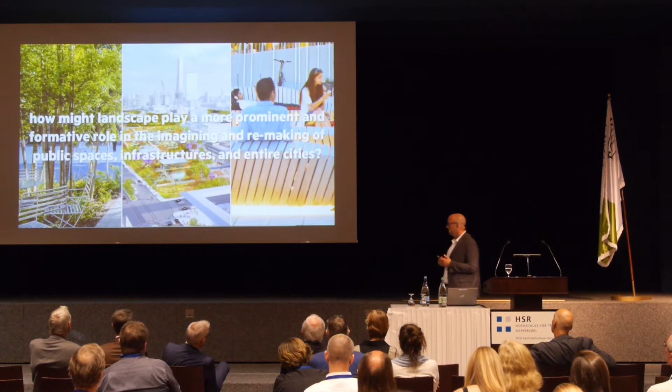Stoss, my firm, is formulated in just this mode, a practice generated from ideas and centered on design, and a hybrid studio informed and cross-pollinated by research, experimentation, and teaching. I really started the practice with a question and a research project. The question was this: how might landscape play a more prominent and formative role in the imagining and remaking of public spaces, infrastructures, and entire cities? Not as a piece of leftover thinking, but as something that really generates new ideas for design and new ideas for the ways in which we live.

The research project resulted in this article called Public Works Practice in Charles Waldheim's Landscape Urbanism Reader. And here I looked historically at a number of key projects throughout North American civil engineering history. And I was looking for ways in which these projects demonstrated interdisciplinary thinking and even entrepreneurial practices within the scope of really broad-reaching projects.

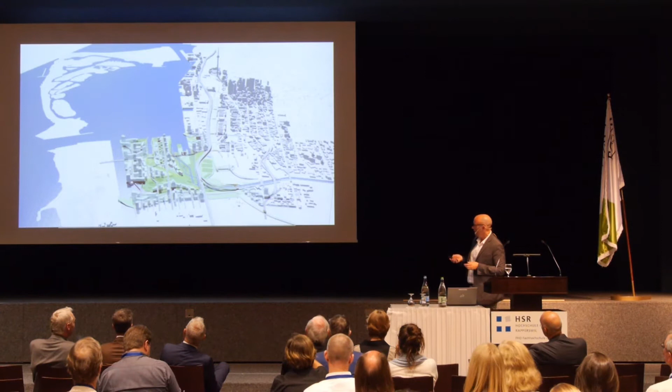Through the practice, we explored some of these ideas at multiple scales using design competitions, this for the Lower Don Lands in Toronto, Canada, a new proposal for urbanism really built on the breeding habitats of fish in the river we were trying to restore. So how is it that we begin to think about ecology as a starting point for remaking the way that we live in dense urban cities?

We also did a few experiments in free play and creativity, understanding that people are quite inquisitive creatures. How is it that you create familiar topographies, unprescripted landscapes, and allow people simply to engage their imagination and their physical bodies in exploring these places? For us, it was a great way to begin to think through the way that people can potentially simply engage with a place, no matter what shape or form it might be.

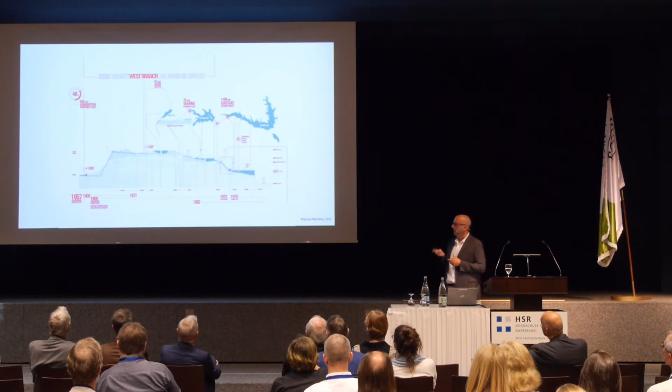I also had the opportunity to teach early on, and did a number of seminars and studio projects that really looked at the ways in which we might recalibrate single-minded infrastructures from the 20th century into much more multidimensional infrastructures that could take on other agendas, ecological, environmental, social, cultural, economic, for the decades and centuries ahead.

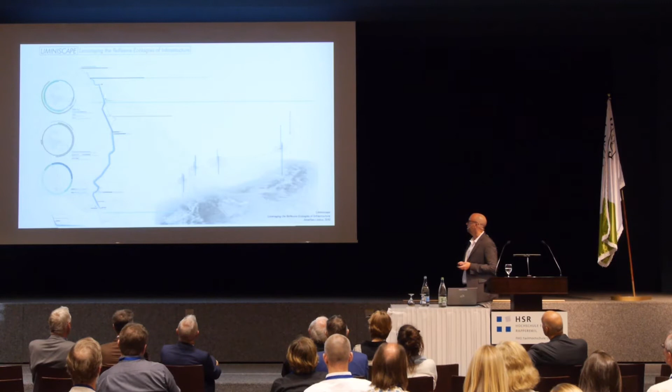So with that as a starting point, what I wanted to do today is just simply explore a number of starting points for us, both in the practice and in my own teaching and thinking. The following three broader topics, I think, offer insights into the ways in which we might use contemporary ideas and techniques borrowed from or in collaboration with other disciplines, as well as contemporary tools and approaches to real-world issues that might better address the complexities and challenges at hand.

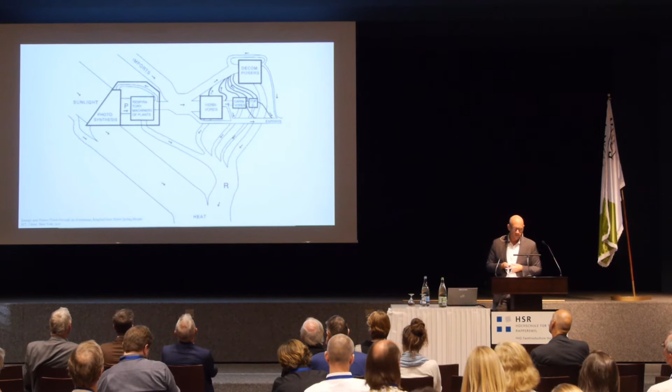So the first of these topics is the idea of flux, flows, oscillations, the idea of being in a state of continuous change. This, of course, is an idea derived from complex adaptive systems ecology, in which the world and its ecosystems are dynamic, constantly shifting, adapting, evolving to environmental and human-influenced conditions.

And as Christian pointed out, these were ideas that we were able to explore through research and this book project with the planner and ecologist Nina-Marie Lister, in which we engaged contemporary thinkers in the natural sciences and in the design arts to begin to think about where the project of ecology is and where it might be going.

But we also use the opportunity to find overlaps between the ways in which we worked. Steward Pickett, at the conference that kicked off this book project, noted that ecologists and designers both work with drawings and models. Ecologists can't experiment on the ecosystem at large. So in a lot of ways, we develop our ideas through drawing and modeling.

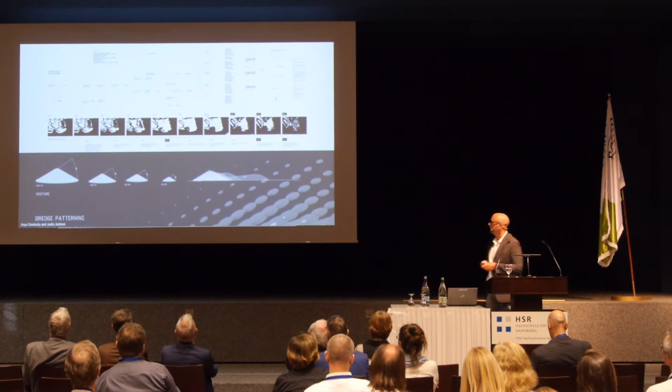And with this idea of a kind of starting point for conversation, I've been able to explore these ideas in a number of different venues. Teaching at the Graduate School of Design at Harvard, we've looked at the ways that adaptive ecologies at work in places like Jamaica Bay in New York City might set the tone for a different kind of adaptive urbanism project that might constantly shift and change in response to environmental informants.

We also had students look at analogs of these ideas. How is it that we might think through interactive real estate games and scenarios that might allow for the building of more robust ecologies? At the same time, it allows for densification of the urban environment, where development here leads to a better environmental state rather than putting this question into debate or as an either-or.

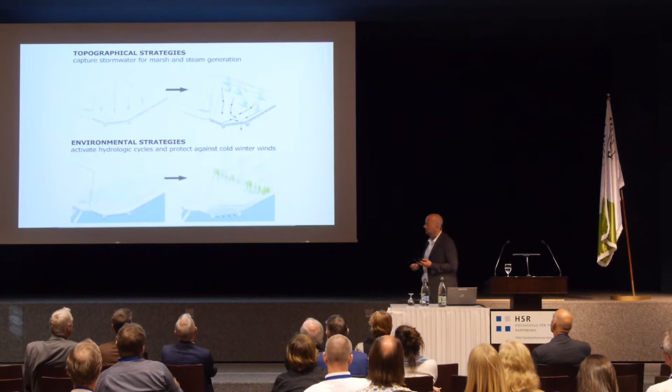Within the practice, we've explored these ideas at a couple different scales and sometimes in very, very simple ways. A project on the waterfront in Milwaukee, Wisconsin, where we were simply trying to revive environmental dynamics on this industrial-filled site. And it's a very simple strategy where we redirected on-site stormwater moving across the site, allowed it to infiltrate the ground, and more importantly, collect in the lower area of the site to reestablish and reinaugurate a dynamic natural marsh, a marsh that the infrastructure and industry of this place once displaced.

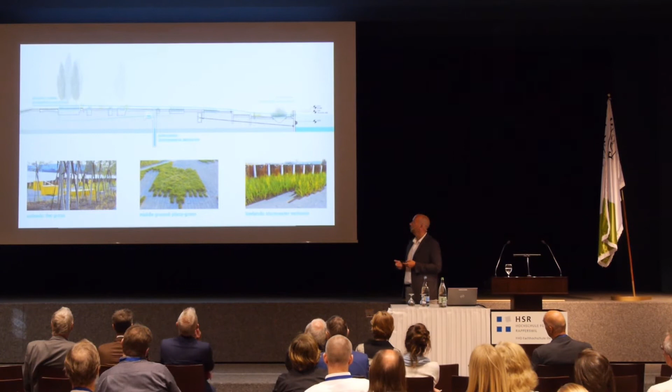We were using some of the protective infrastructure to help reestablish this marsh. And the marsh is really quite dynamic and beautiful. It has many different seasons to it. It has many different characteristics to it. And just the simple change in season allows for a reading of environmental dynamics right in the city. We also cut slots into the existing bulkhead wall so that at high water levels, the river would invade the space. So giving water space within the city was really quite important.

There are also a set of material ecologies at work here. The very specific relationship between the rusted steel bulkhead wall, the really soft and lush marsh plantings, and these new fiberglass seating and lighting elements for us put in play a conversation between the natural, if you will, the industrial, and a bit of the technological. And of course, all of it is there to really embrace people and really understand that the dynamic that we're interested in here is as much social as it is ecological.

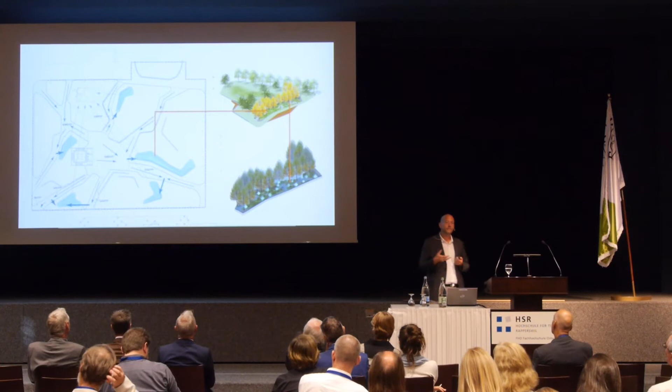Taking the idea one more step, how is it that we can bring sustainability to life in urban spaces? Working at the University of Michigan, a project where we're trying to capture all the site stormwater in these five very lushly planted infiltration gardens. Here we were interested not only in creating a beautiful garden and performing the function that was required, but how is it that we can really bring this ecological function to life so that it's experienced in wonderful ways by people. So here we're developing an environmentally responsive lighting strategy, one that's integrated within the gardens.

You can see the little light fixtures here below the mature bald cypress trees. And the idea is that every time water enters that system, the lights will flicker. So at that moment where it's most miserable, most cold, most rainy, where people want to run away as quickly as possible, we've brought this garden to life in ways that really make you want to linger and really have a wonderful effect on the ways in which people might experience this place.

Some of the tests, this was just last Thursday. The elements are going in and being tested right now. And so it's an exciting moment for that project, and one of the first opportunities we've had to do something with a little bit of refined technology in it.

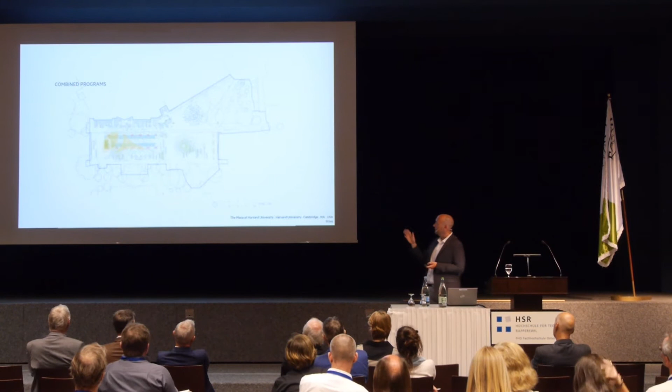It's also a space that's set up to host a number of different changing activities. So the surface, even though it's quite simple looking, is really embedded with foundations and utility hookups, water, power, et cetera, so that any number of different activities can actually occupy the space. So as part of the design process, we were looking at the scripting and scoring of these different activities and the ways they might inhabit the space. And that allows really for a constantly changing mix of activities, whether it's markets or performances, student boxing matches, skating, curling exhibition. Last winter, memorials for the Boston Marathon bombing, and even student protest.

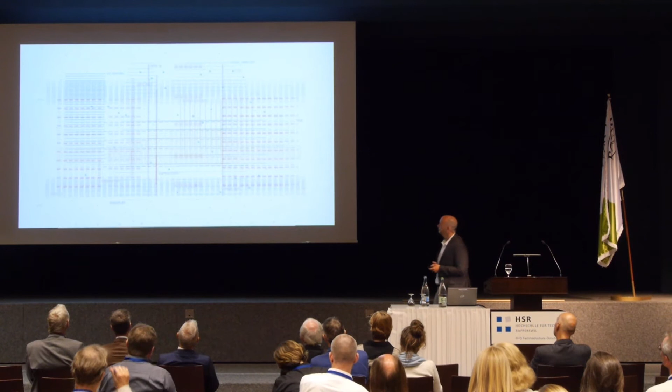And it's become a space that's iconic at the heart of the campus, incredibly successful simply because it takes on these same ideas about ecological adaptability and dynamics and choice and diversity, and really scores that into a public space. Even the infrastructure of this space. This is the crash wall that prevents trucks from leaping over the edge and crushing the cars below. Even that infrastructure is civilized in a way, inscribed with wayfinding and seating and bicycle parking, so that each of the elements of the project perform multiple functions in distinction to the existing piece of infrastructure, which really was set up to perform one.

Second topic, generative processes. Here I'm thinking about relational and associative techniques and technologies, design that is neither static nor compositional, but dynamic, assemblies of forms and components that might be generated from a set of logics that can adapt themselves to circumstance or changes as projects are conceived and deployed. Here we're using tools and techniques that other design professions and other disciplines are using. We're thinking about construction and fabrication technologies, and we're thinking about ways in which their applications can be quite versatile, from the scale of furniture and the human body to the landscape and the site, all the way up to the scale of the city.

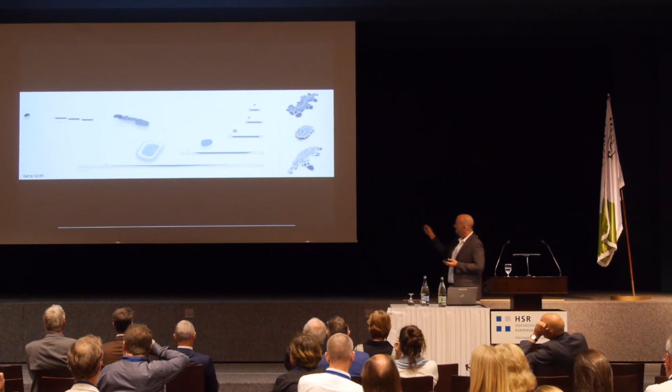These projects were early explorations in how you use dynamic and associative tools to begin to generate new ideas of flexible landscapes set up on a set of principles. This is a water collecting, cleansing system for contaminated runoff, and understanding that that system might be deployed in multiple ways depending on the condition and the ways in which those projects might hit the ground. And these are tools and techniques that we're exploring in many, many different ways at the GSD as a foundation for the way in which landscape architects might begin to think about the making of landscapes and cities.

And of course, you saw those same tools and techniques being used in the benches at Harvard. This idea of many, many, almost an infinite variety of combinations and prototypes were developed for the project. And we're working between analog and digital tools in order to test these for fabrication and installation. Again, each of these is built on a set of component parts, put in different combinations with one another, and then deployed in different ways on the site. Each of the ribs is numbered and can be easily replaced, using some of the same software technology to power the fabrication machines that we're using in the office to design the landscapes.

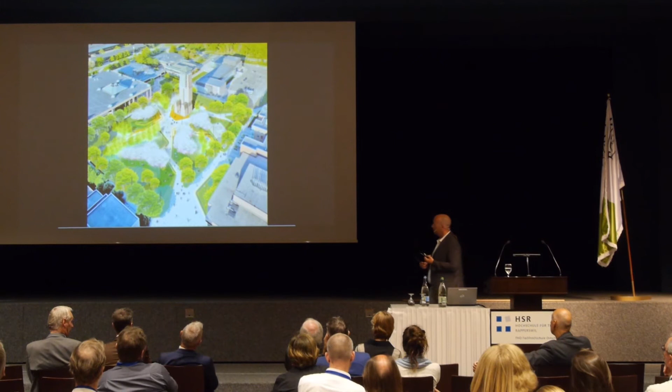Again, at the University of Michigan, this reinvention of a 4-acre quadrangle uses these same tools and techniques at the scale of the site. In some ways to generate a space for walking and gathering in many ways. But here we're using a combination of landform, seat wall, and seating elements in combination deployed across the site.

You can see this project in a state of construction. This happens to be the final version of this, but the tools really allow us to study very quickly different combinations, different massings, different deployments in ways that set up different spatial and physical relationships and spaces for other kinds of program to play themselves out.

Again, experiments with seating. We're finding that even though we started this project thinking about ourselves as urbanists, a lot of the work we're doing is really at the scale of the human. So these are concrete and metal benches built from a set of parts that can be put together in various combinations to create different kinds of seating arrangements deployed across the site in order to then create the kinds of flexible and diverse spaces that we were interested in creating here.

And here you can see a couple photographs just from last week. The project isn't quite done, but they have opened it as the semester's beginning, and we're excited to see the finishing pieces of this come into place.

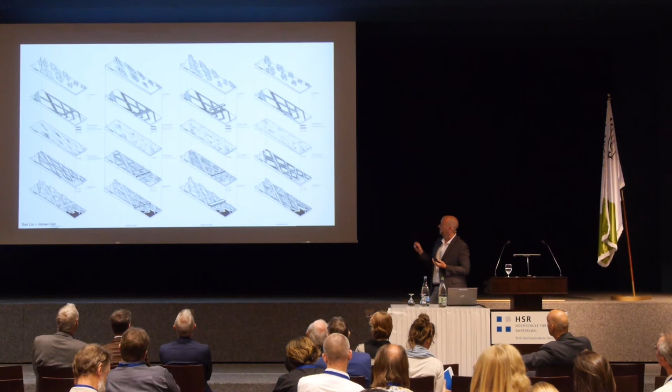Of course, these are some of the same tools we're now equipping our landscape architects with in school. So in the Core 3 Urbanism studio, this is one that Pablo Perez Ramos, who is here, is teaching this semester. We're working with students to really think through in very iterative and quick ways how these tools and techniques can be used to generate landscapes in response to hydrology, landscapes in response to human use and activity, and really starting to scale that up so that these landscapes are then thickened to be embedded

with infrastructure and ultimately with buildings, so that new forms of flexible, diverse city-making techniques are really put forward as what we can do. So the same set of tools being used for everything from the bench to a multi-hundred-acre urban district. I think these are the tools that give us possibilities and insights to help move the profession and discipline forward.

And finally, the third topic I wanted to talk about, dynamic frames: the idea of scaffolds that bring to light conditions or change, or that establish loose frames that might instigate appropriation, growth, and change, or dynamic and multifunctional infrastructures that themselves might be able to adapt to ongoing physical, environmental, social, political, and economic change over time.

We had the opportunity recently to work with Höweler + Yoon Architecture out of Boston on a project in Washington, D.C., on this bridge, or former set of bridge abutments. And here the client was interested in this question of how do you take what was formerly a single-minded infrastructure and diversify that in many ways. How is it that you might make that a center of civic life? How might that help us establish connections to the river and environmental life? How is it that that bridge park might actually help close the gap between communities on one side of the river and communities on the other?

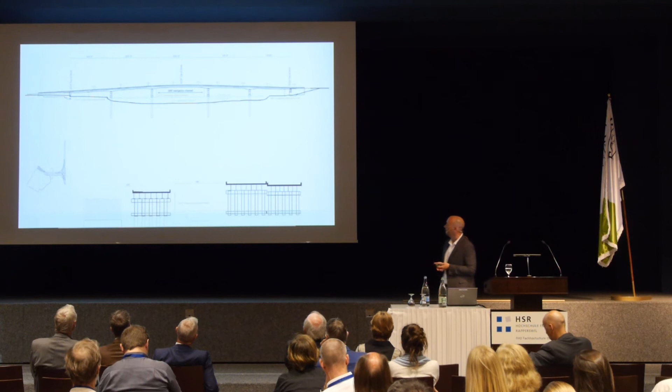The very simple diagram was that the bridge might be an infrastructure that connects social and environmental networks at this one point of crossing across the river, and yet in many ways had to behave like traditional infrastructures do, with certain clearances, structural requirements that behaved relative to the fluctuating water levels, and that was subject to the many, many different kinds of organizations that might have influence over a project like this.

The strategy was to build a bridge from a kit of parts. And so when you talk about design strategies that are flexible, that allow for iteration, that might allow for different formations of a particular project, here we were thinking of how we might use those same techniques and technologies, but even bring them into the public realm. How is it that we might identify a set of paths, activity infills, green surfaces, and clip-ons that then might be arranged in different ways?

And this was an exercise we engaged in the office, but it was also a tool that we intended to use with the public as a way to begin to explore how we might give priority to certain kinds of activities and uses that they were bringing to the discussion versus others. And this was a tool that would allow us to play those scenarios out in real time and really gave us a sense of going in to the project.

It was a limited design project, not only being able to propose a solution to the problem, but showing that the project itself was quite flexible. And we had a set of tools that would allow us, through engagement, to find other forms of the project that might be as useful or even more useful as the

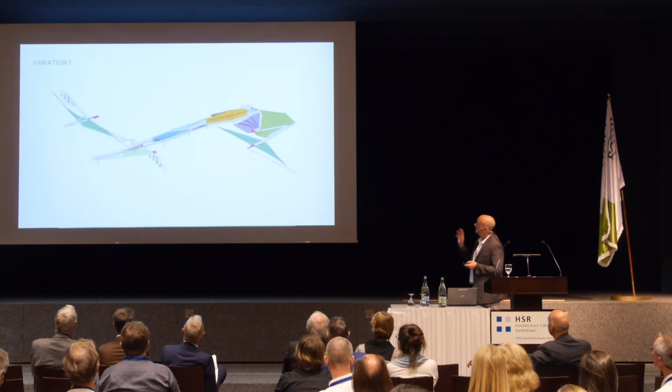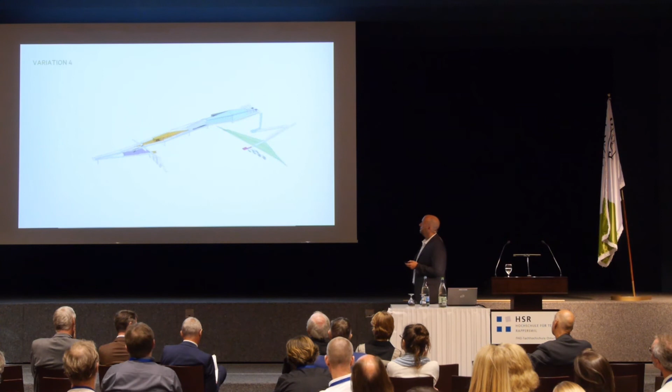project might play out. So, with that flexible kit of parts, we could imagine that the project itself might play itself out in different ways, according to different social priorities, according to different budgets, that overall the configuration of the elements might change, but individually within the project itself, certain pieces could be one thing or another depending on the set of conversations we were having and the set of priorities that we were putting out there.

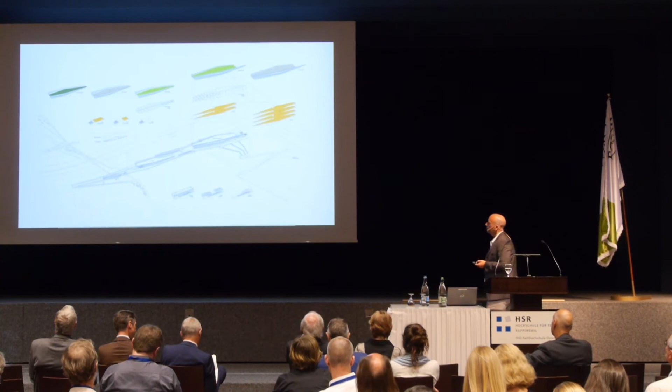And so this is one demonstration of the project, the idea that a single pathway is multiplied and expanded across a larger surface, that surface is then thickened to accommodate different kinds of social program, and that the gaps within that are then filled to certain degrees with other kinds of activities and programs that might allow for bringing that project to life socially, culturally, environmentally.

So you can see here the multiple pathways, the way the pathways thicken, the way the infrastructure accommodates planting and other forms of structure and social space. So that the bridge becomes a point of destination as much as it functions as a physical crossing.

So with that, the project becomes a combination of different kinds of pathways that connect both on the bridge and to the surrounding neighborhoods on the edge. The pathways thicken to accommodate other kinds of social program and activity. The gaps within the paths are there to be occupied by different forms of play and recreation and art and culture and education.

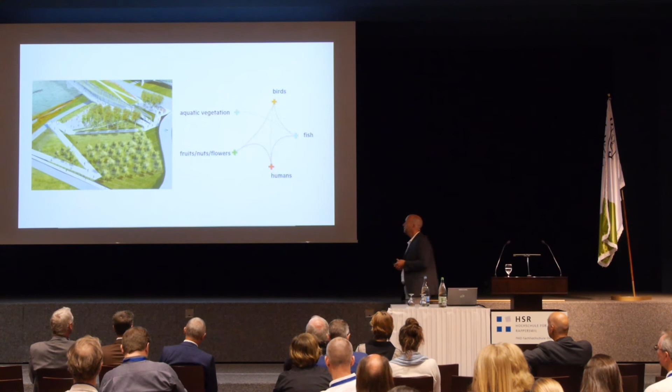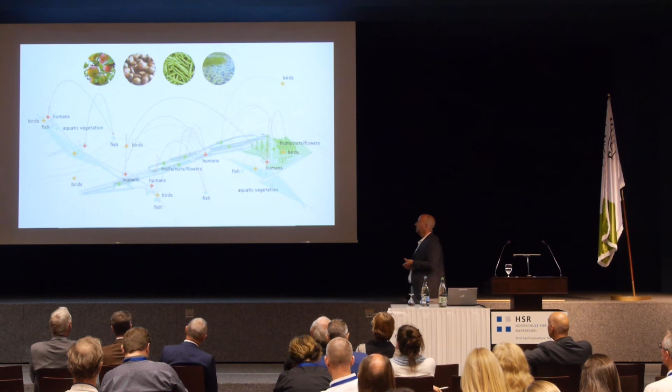There was also a specific agenda here that was ecological, a bit agricultural, a bit food-oriented, in a food desert within the city, a food desert both for native wildlife and for people. One of the questions was how can the project really serve to develop an ecological network that could feed humans, fish, and birds through the ways in which the planting was considered for the project.

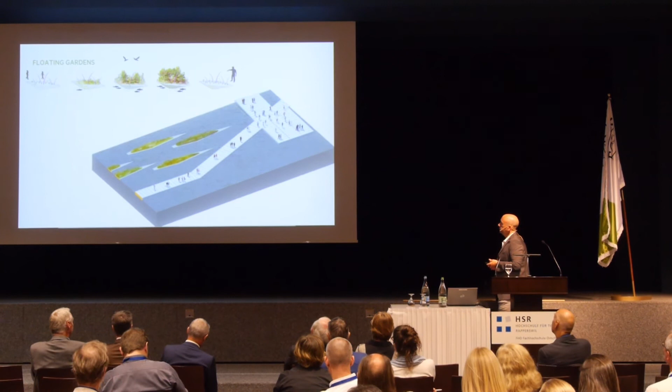So anything from the development of fruit orchards on the banks to eating establishments at the center of the bridge to floating gardens and wetlands that would both clean the water and provide food for fish and other forms of creatures. So in many ways, a multidimensional infrastructure that takes this idea of a single monofunctional piece of highway infrastructure and really transforms it in ways that help extend social, cultural, economic agendas within the city.

We lost that competition. We lose a lot of competitions. In fact, that first competition I showed you, we lost that one too. And I've said a number of times that we're one of the few firms that have built our entire reputation on losing competitions. This is one that we built, that we won, but then it didn't have a prize or it didn't really have a project at the end of it. So I don't know if we really won this or not.

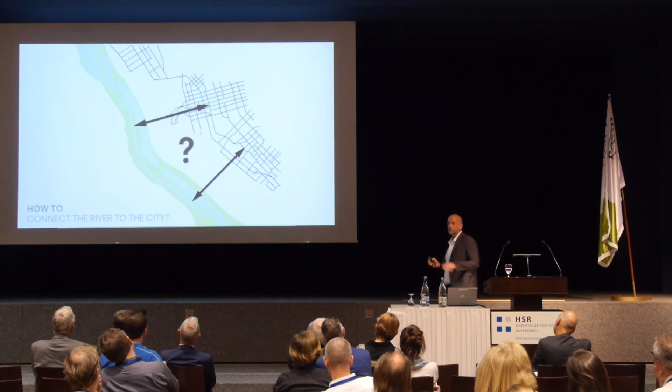And so there's something quirky about this place and kind of rich and lively that we also wanted to play on with the project. So beyond the earnestness of what are we going to do here, how is it that we might capture this kind of ridiculousness in the project itself? So again, how do you connect the river to the city rather than thinking about thin landscape fingers or something, or even the idea of simply erasing the highway infrastructure, which is just inconceivable in a place like Texas? How is it that we might extend existing neighborhoods to the edge of the river itself?

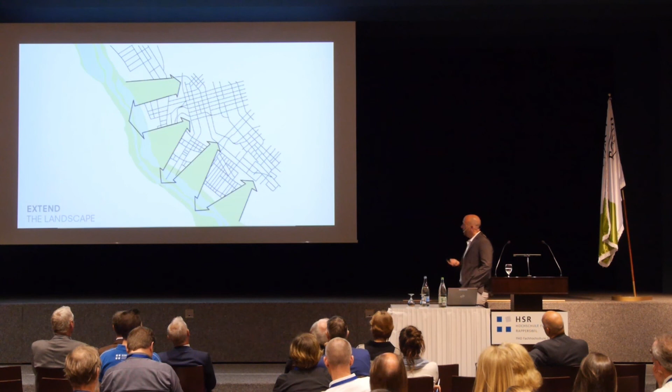And in some of the more difficult spaces, the highway interchanges et al., how is it that we might very simply extend the river landscape back into the city itself, thereby setting up this kind of green grid alternating pattern within the city? In doing so, each of the new neighborhoods and some of the existing neighborhoods would have direct frontage on this new rich and robust landscape. At the heart of it, though, was how to revive the old river, which was still being used to collect all the city's stormwater before that water was then pumped into the levee system.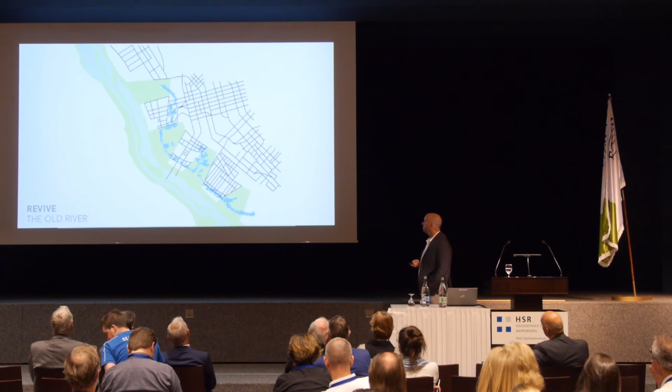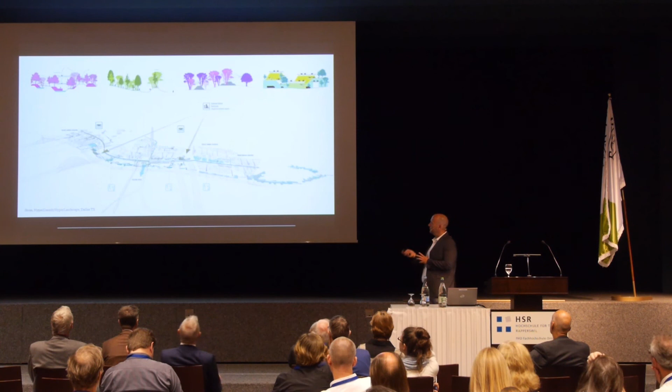At this point, though, these were pretty dirty and denuded ditches underneath the highway interchanges. And for us, it became a question of how do you bring those back to life? How is it that those can be cleaned up, that they can bring new ecological life to the city? How is it that they might form the heart of some of the new neighborhoods and open spaces? And so this is a highly re-engineered system that still deals with the basic requirements of flood control, but it's also set up to then spawn these other kinds of occupations and uses, anything from cleansing wetland gardens to new economic development initiatives for the neighborhoods to come.

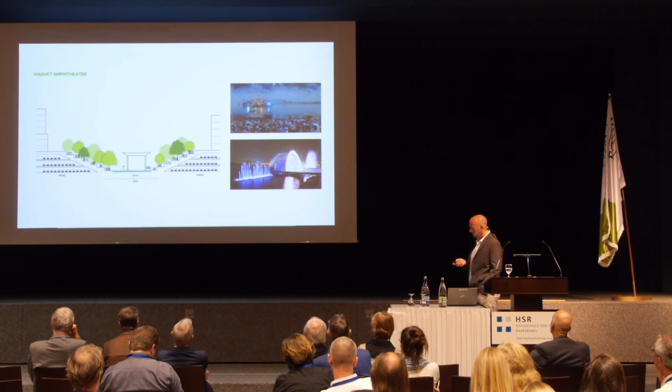Some of the proposals were quite playful: a new urban beach within a mixed-use arts district, a very dramatic water amphitheater at the heart of a high-density new neighborhood at the foot of downtown, and then a series of water gardens at the south end of the site, again at the heart of a new mixed-use neighborhood. So water and aviary gardens that would draw on stormwater from the district and from the surrounding cities to put in place a new set of dynamic gardens that were as conducive to hosting these kinds of creatures as they might be conducive to hosting art shows and cultural events as well.

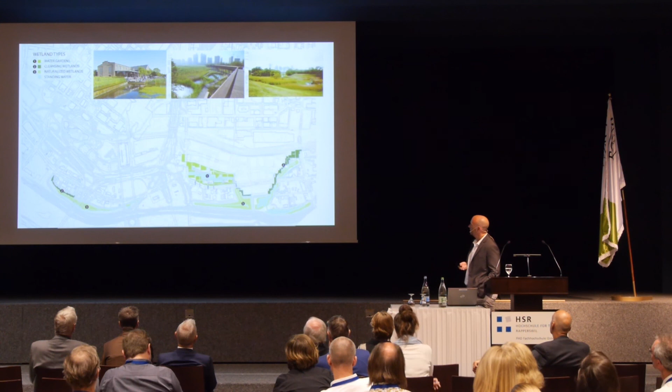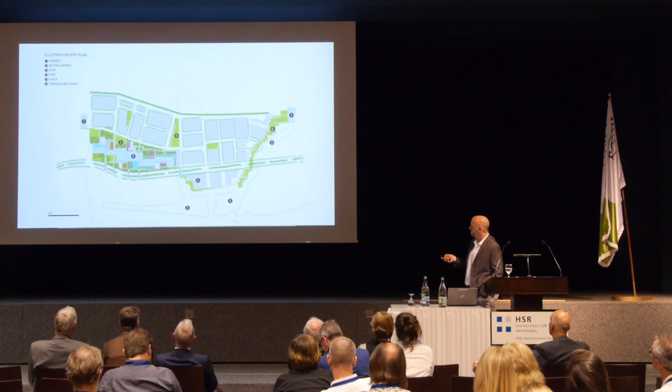So we're in the midst right now of engineering and designing this system so that you have water inputs, cleansing terraces, and that the water really is then brought into the central 20-acre open space that really allows for the playing out of stormwater dynamics within the city. We are actually moving forward with a developer on 120 acres of property here. Here you can see the orchards and gardens as they're being designed and engineered. But the idea here is to really allow the stormwater and drought to bring to life the garden in the heart of this new district.

That even at the most threatening moments where Dallas is being inundated by rain, that people are invited into the garden to really share in this experience that's at once environmental, social, and urbanistic. And really finding ways that gardens like this might become the heart of new neighborhoods, thereby becoming as much an economic catalyst as they are social, cultural, and environmental.

So just to wrap up quickly, I think at the core of all this work is a dogged interest in the various ways in which multivariate landscapes, living, breathing, operative, might play a more formative role in the reimagining and remaking of cities, public spaces, civic infrastructures, and metropolitan regions, thereby bridging spatial, disciplinary, professional, and intellectual gaps.